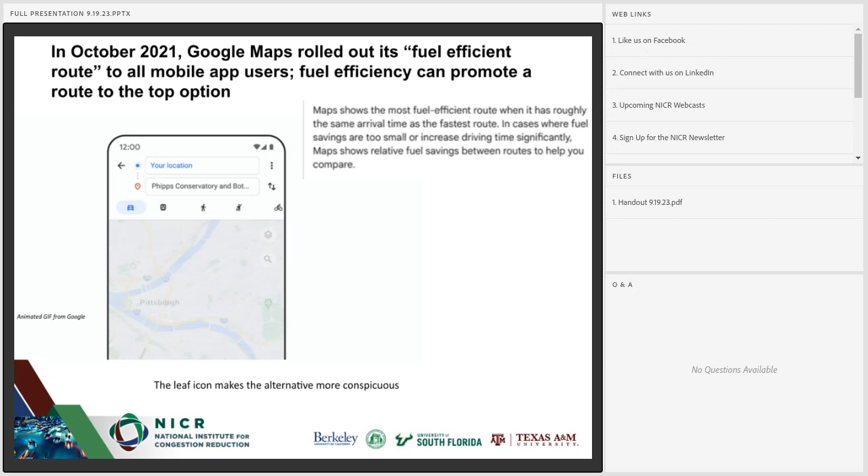So, to start with our analysis, we kicked off our evaluation with the RouteE model, which is basically an open source tool that gives you an estimate of how much energy your vehicle will use on a particular route. The NREL model indicated that it included factors like road grade, speed profiles, and road type. So we tested three scenarios.

The first one was where the car was traveling at 70 miles per hour for 6 miles, and then 30 miles per hour for 6 miles. The second one was where the car was traveling at 70 miles per hour for 1 mile, and then 30 miles per hour for 1 mile, repeating this cycle 6 times. And the third one was where the car was traveling 70 miles per hour for 0.5 miles, and then 30 miles per hour for the same distance, repeating this cycle 12 times.

To our surprise, we noticed that all these scenarios reported the same energy or fuel consumption, that was 0.37 gallons of fuel. So, this indicates that the software was not accounting for at least some speed fluctuations. RouteE may be accounting for variation in speed when a vehicle travels 6 miles at 30 miles per hour, and it assumes a speed cycle that fluctuates around 30 miles per hour. However, the abrupt change to another speed, for example, from 70 miles per hour to 30 miles per hour, which can happen really frequently during peak hours on general purpose lanes, was not accounted for.

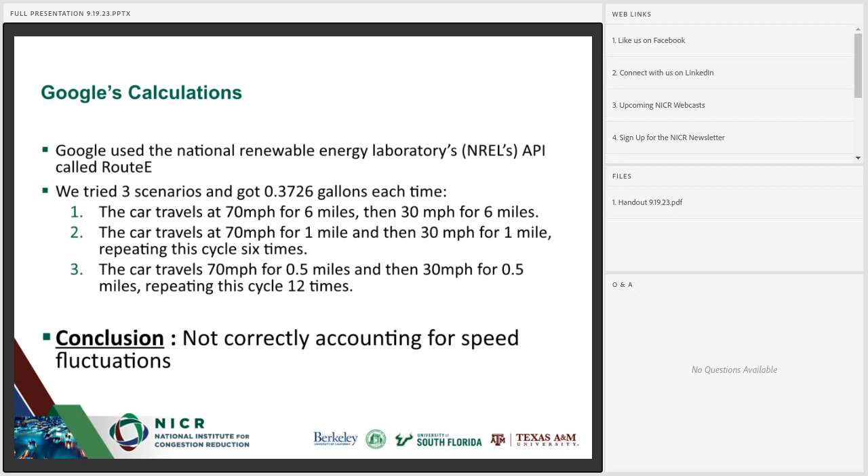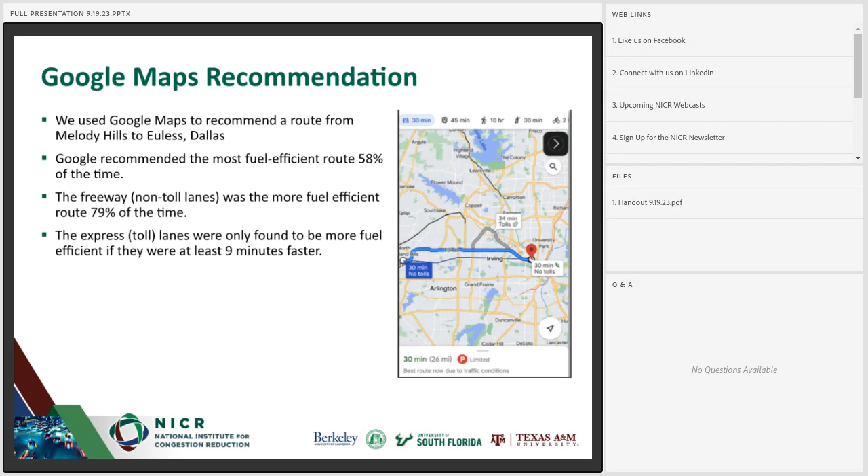We then studied the trends in the recommendations suggested by Google Maps. We did this by selecting different origin and destination points, like from Melody Hills to Euless, Dallas, at various times throughout the day. We recorded what Google suggested for the route, including the travel time and the type of lanes it recommended, and we found that Google recommended the most fuel efficient route 58% of the time. And the non toll lanes, that is the general purpose lanes, were the most fuel efficient route 79% of the time. And the toll lanes, that is the managed lanes, were only found to be more fuel efficient if they were at least 9 minutes faster.

So, after the initial investigation, the next logical step was to carry out vehicle runs and collect our own data on speed, traffic conditions, time of the day.

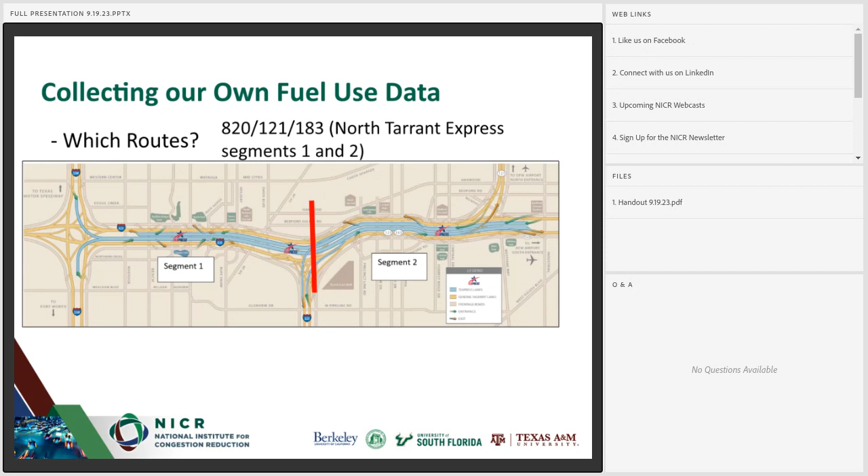To do this, the team selected North Tarrant Express lanes in Dallas. We categorized it into segment 1, 2, and 3. Segment 1 was the Northwest Loop, segment 2 is the Airport Freeway, and segment 3 is the I-35W Interstate Highway Corridor.

We chose our study location where freeways had managed lanes and general purpose lanes running side by side. Also, the selection of these segments was also influenced by the ease of access and the granularity of the data from Regional Integrated Transportation Information System, also known as RITIS.

The speed data from INRIX was used to identify the typical speed fluctuations across the time of the day on both managed lanes and general purpose lanes. We then generated box plots displaying the speed distributional characteristics. From these box plots, the research team identified the speeds on managed lanes and general purpose lanes at peak and off peak hours.

The graph here displays speed fluctuation on the managed lanes of the Northwest Loop in the eastbound direction. It clearly illustrates two peak hours, one in the morning and another in the evening. The morning peak hour has slower speeds compared to the evening peak hour, suggesting that there is more traffic congestion during the morning peak hours.

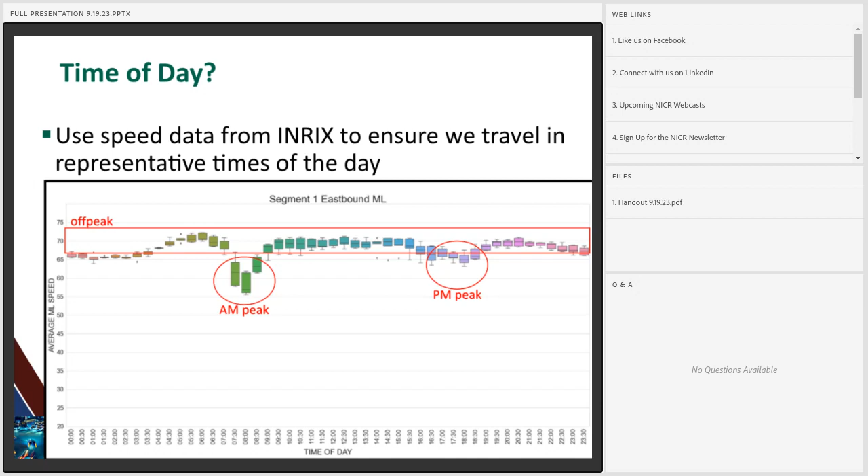Whereas on the general purpose lanes, we have AM peak, PM peak, but we see significant congestion levels during the midday as opposed to managed lane.

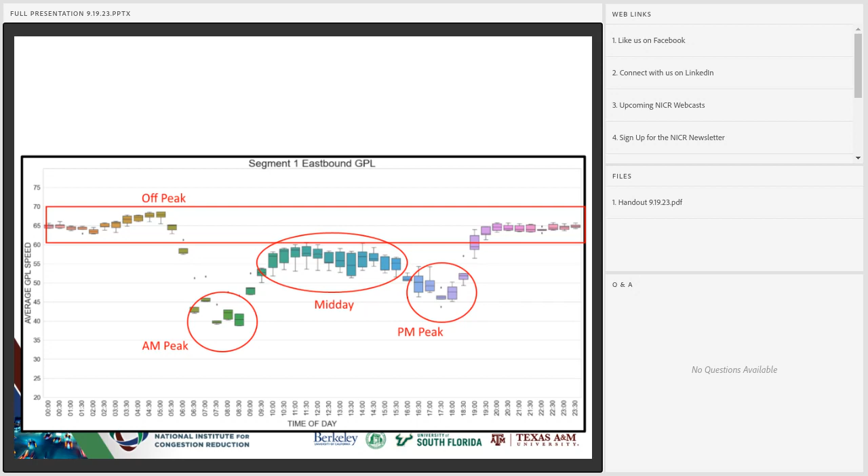So now I would like Jeremy to take it from here. Sure. Thank you, Mahim. Let's see if this works.

Okay. So my main job here at TTI is running our emissions laboratory, where we do a lot of testing. And a lot of the testing we do has to deal with collecting in-use data for vehicles and fleets. And so, as Mahim mentioned, part of this project was to collect some real-world data on the segments of roadways that she already mentioned.

So the way we did that is we used what's called OBD data loggers. They plug into the OBD port of a vehicle and record data that the vehicle reports while it is operating. The data loggers that we typically use at TTI are from a company called HEM Data. You can see a picture of it here in the upper right.

These data loggers are fairly expensive. $1,000 estimate here is actually probably a little bit on the low side unless you're buying bulk. So they can be very, very expensive. So one of the things that we wanted to do as well was, in addition to using those that we typically use, was testing some alternatives that are cheaper.

You can find some data loggers online that are much cheaper. $15 obviously is way below what the HEM Data's cost. But there are some kind of drawbacks to those. Some of them require a smartphone connection that's shown here, where they don't always record data. So a user or driver would have to get in the vehicle, turn the app on, start the data collection every time they start the vehicle.

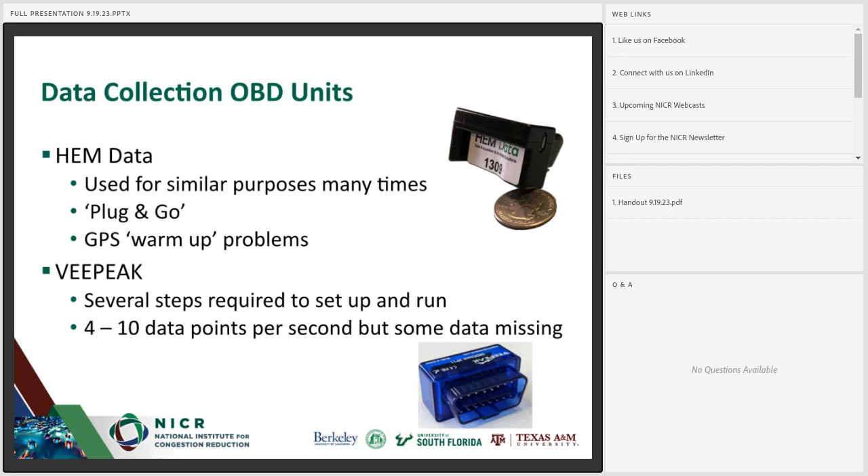So sometimes there were 4 data points per second, sometimes there were 10 data points per second, and then sometimes there would be multiple seconds in between data points that were just missing or blank. So one of the things that we did then to compare the performance of these two is we bought a splitter. That way we could plug them both in and actually record data at the same exact time and compare the performance of the different data loggers.

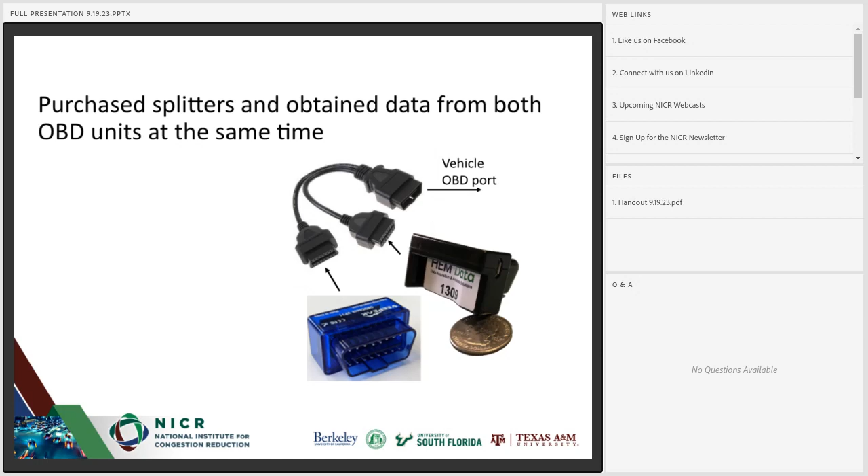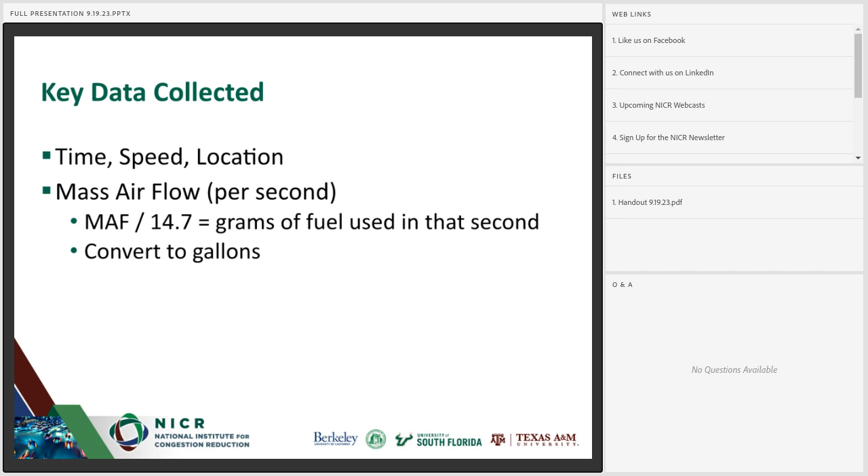For this project, the key data points that we needed were time, speed, location being a GPS chip that is embedded in the device, as well as the mass airflow that is being reported from the vehicle. And using these, it allows us to, on a second by second basis, estimate the fuel consumption of the vehicle. We use the mass airflow and do the calculation that's shown on here to get an estimated second by second fuel consumption for the vehicle as it drives on the roadway segments that we are interested in.

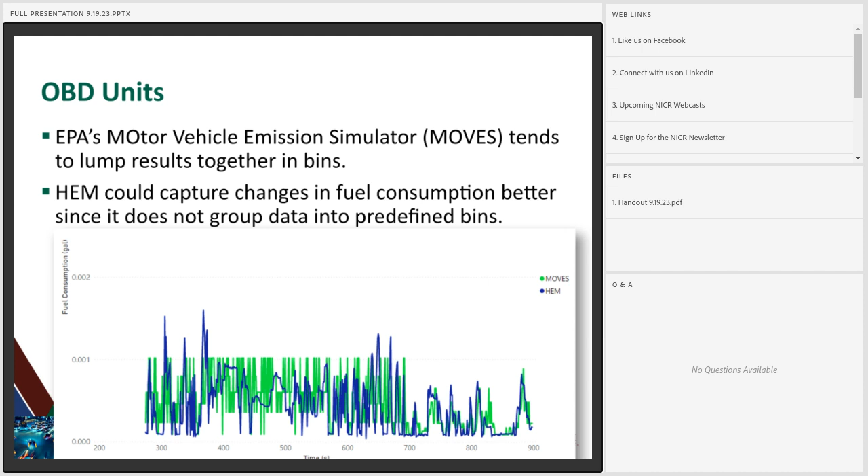So you can see there's a very distinct line at 0.001 or just above 0.001, where the MOVES model is often estimating, whereas the HEM data has more fluctuation in it as it drives. So it does track very well, but again, there are limitations, and that's mainly because MOVES was not designed to do that. It's meant more for a fleet of vehicles and population estimates versus single vehicles. So we were trying to use it in a way it's not necessarily designed for.

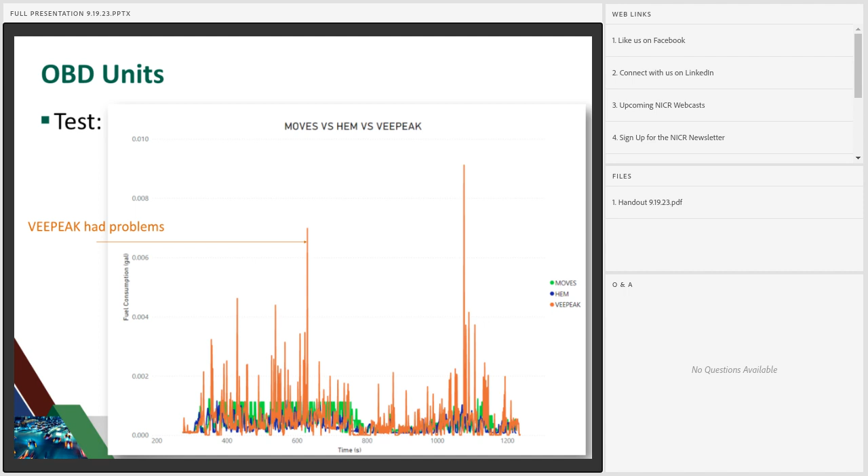And so now I'm going to go back and see what we had with the VEEPEAK. As we mentioned, the VEEPEAK data often had missing data. It would have a couple seconds where there were not any data. So we would either have to try and interpret that or just not have it in the analysis and the comparison. And it also seemed to have data where it spiked, as you can see here, greatly on different occasions. And so in the end, what we used for our analysis was the HEM data that we were able to collect.

Mark, I'll let you take over. Yeah, thank you.

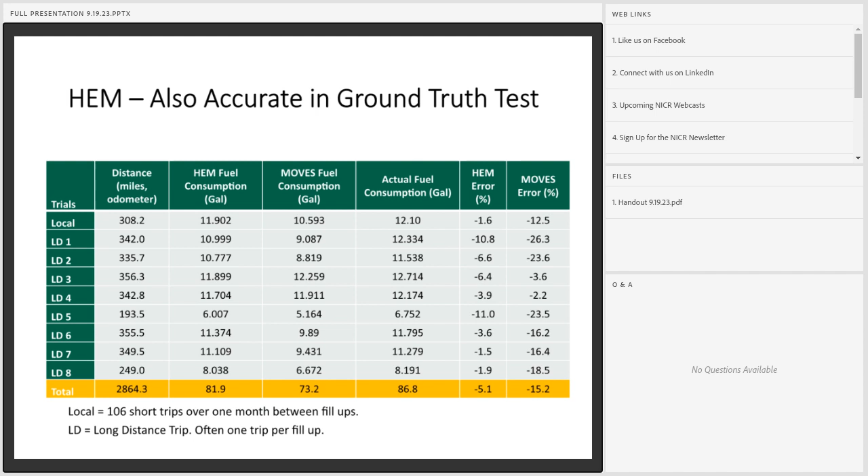So now that we had the devices and the roadways we wanted to travel and check for fuel efficiency, next up we attempted to get a variety of vehicles. And obviously this is a pretty small list. We didn't have a huge budget to do dozens of different vehicles, so we've got a relatively small list of vehicles. We tried our best to get a different variety of SUV, sedan, hybrid, and pickup truck.

We ran into some difficulty getting hybrid vehicles, as they were difficult to rent, and some difficulties with pickup trucks in that the newer models didn't provide mass airflow. When we had the HEM data device, it didn't grab mass airflow from newer model pickup trucks, Fords. So we had some limitations there, but nevertheless, we went out and collected data on those 2 roadways Mahim mentioned.

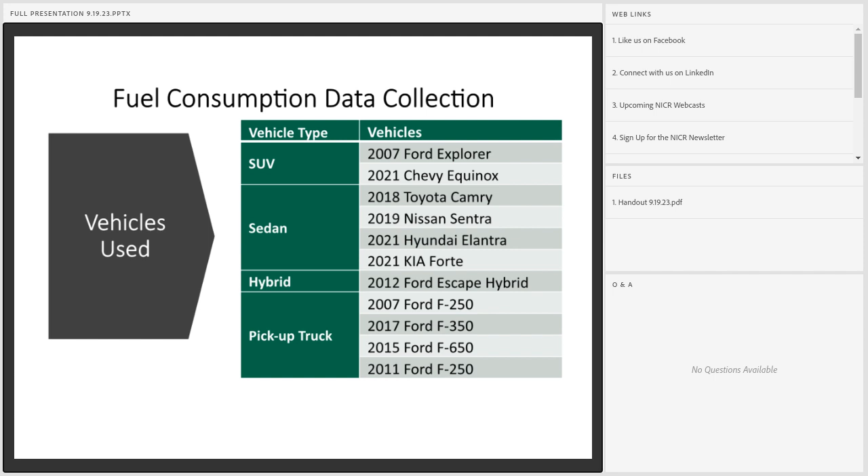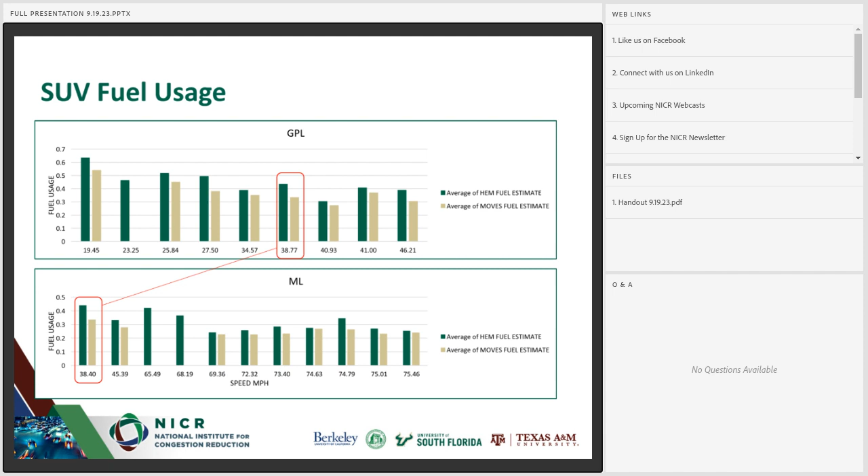You'll also notice that the HEM fuel estimate here is generally higher than the MOVES fuel estimate, probably meaning our SUVs are less fuel efficient than the average SUV used to put together the MOVES fuel estimate. But some fairly consistent results across the speeds. But we can quickly see we didn't have enough data. Even with 100 plus trips, there were far too few on a given road in a given vehicle type for a specific speed to do a whole lot of comparison of managed lanes versus general purpose lanes on these full length trips.

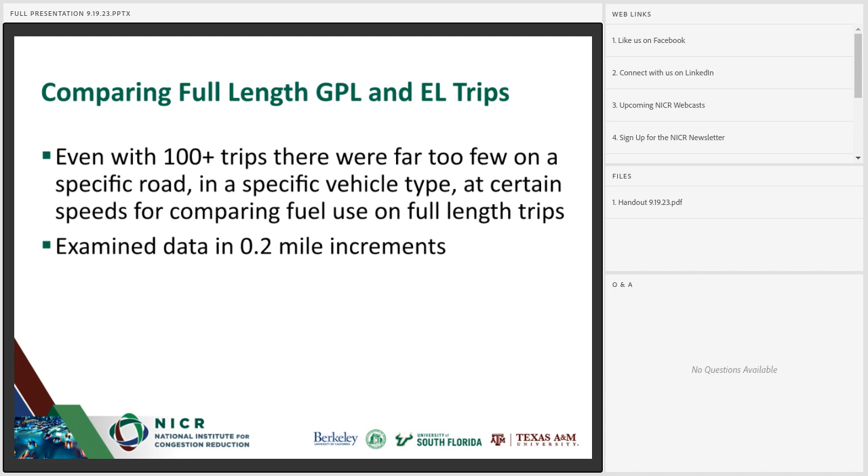So RouteE used 0.2 mile increments to do their analysis, and we used their API to calculate the amount of fuel used in 0.2 mile increments. And we thought, okay, we can do the same thing. We have GPS data, second by second GPS data. We can cut all of our trips into 0.2 mile increments and estimate the amount of fuel used each 0.2 miles. And when we did this, we would look at our results from the HEM data, and we looked at RouteE, the API estimated fuel use over those 0.2 miles.

Let me grab, looking over, oh, wrong button. Draw. No, it's not letting me draw on here. Okay. Oh, there it is.

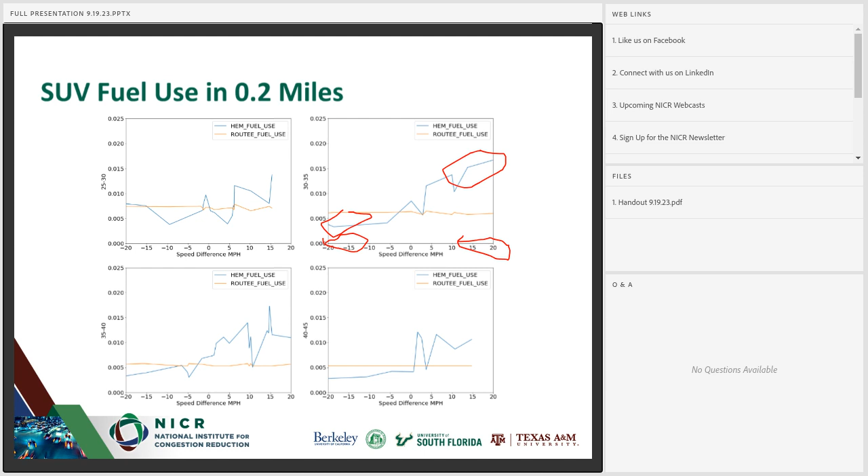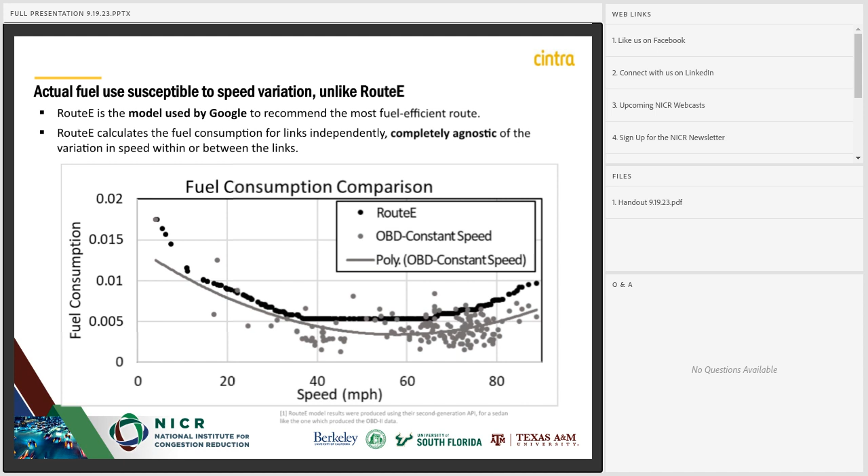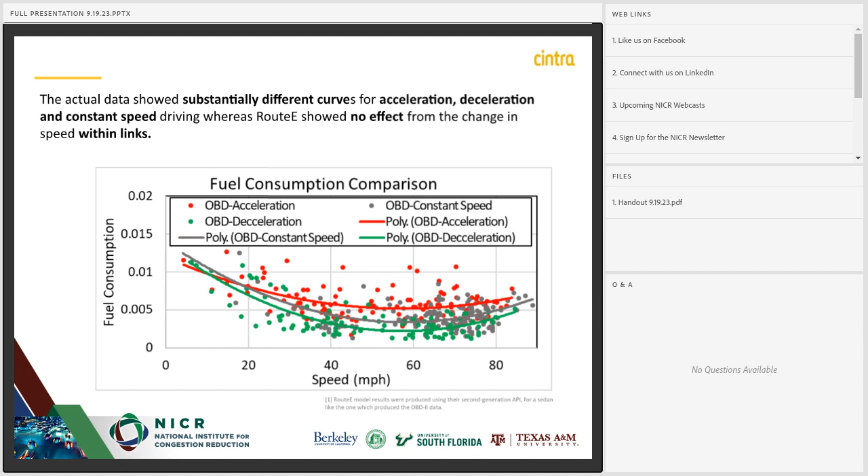And we'll see even more variation if we separate out when our vehicle was accelerating. You see that in red, and the amount of fuel used is generally higher when the vehicle's accelerating and generally lower when the vehicle's decelerating over that 0.2 miles, where again RouteE gave you a consistent value of fuel use.

So in looking at this, we thought, okay, we've got enough data to do a test of a concept here. Can we develop regression equations for the amount of fuel used in 0.2 miles for a given vehicle type at a given average speed and a given amount of speed change?

If we can do that, we can apply these equations to Wejo data that is available, and in this case, Cintra purchased Wejo data for their facilities, North Tarrant Express, and they have detailed data. It's typically 5 to 7% of the entire traveling population out there, so 5 to 7% of traffic. You have the exact speeds of those vehicles. So we applied our regression equations to these real world data of travelers out there on the freeway based on Wejo data.

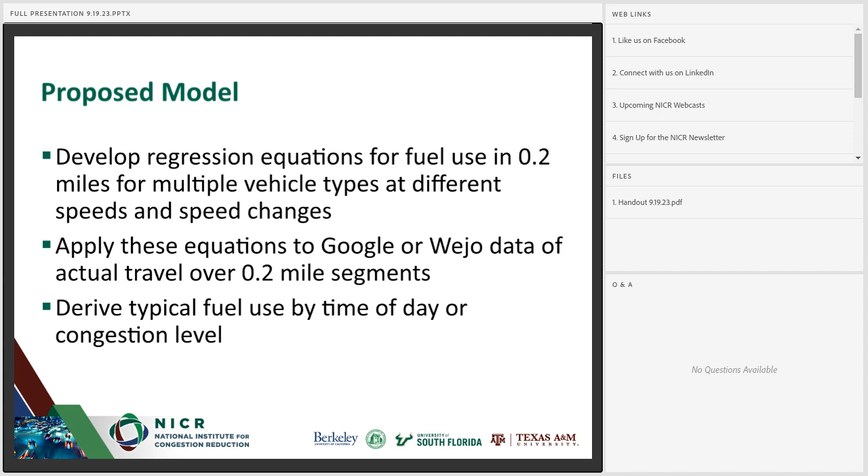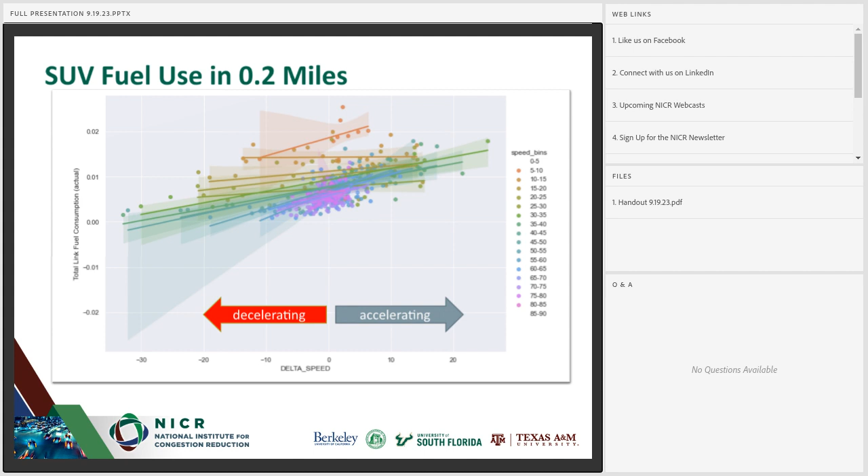over that 0.2 miles. And we could do that for all of the vehicles on that section of roadway, and then add those 0.2 mile segments of roadway together to get the amount of fuel used over the entire general purpose lane or managed lane on a facility.

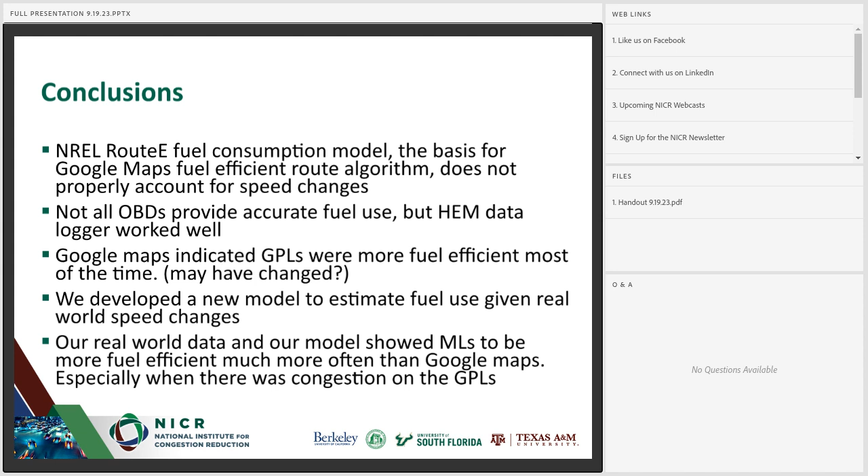So our next step is to have a much larger amount of data and more vehicle runs and a larger variety of vehicles, because we know our sample is relatively small. It's more of a proof of concept that, hey, we can get real world data to feed a model to get better instantaneous fuel use information. But we need to get a lot more data, and Cintra is moving forward with this as we speak in Austin, giving a lot more HEM data units to more drivers and collecting data right now.

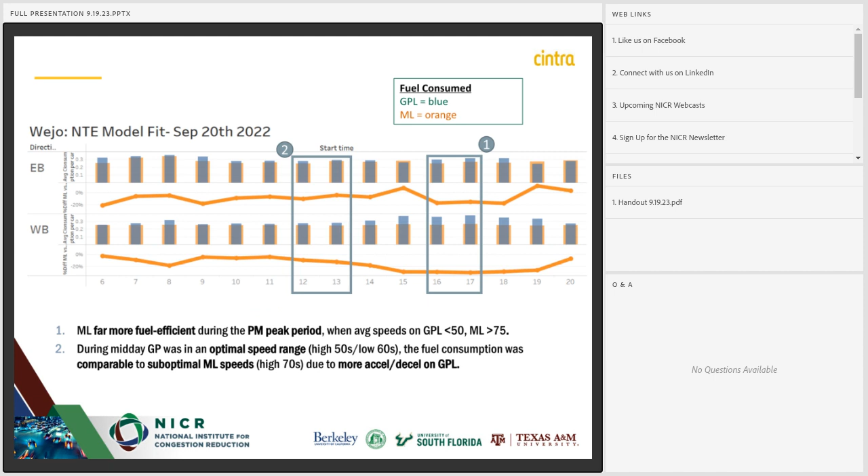Can we get the data? Get the data API? We don't have an API for this. What we have are those equations, and those are available in the final report. I'm flipping back to those. Like the extended version of this, we have.

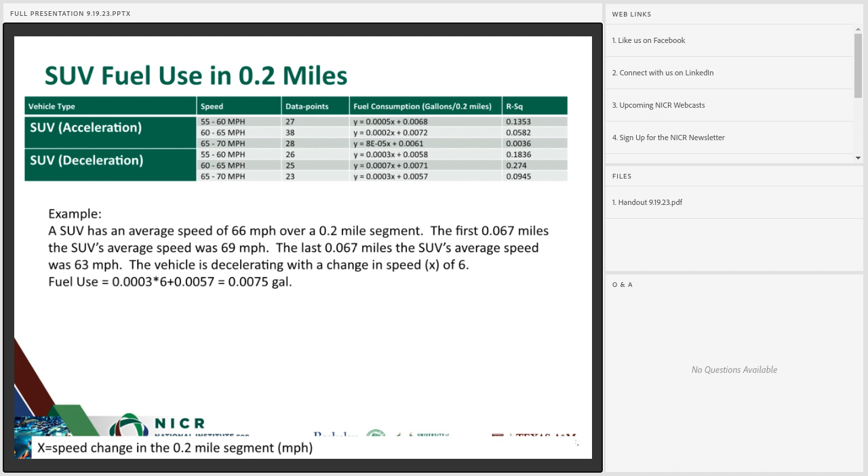At this point, they're interesting and a good proof of concept, but I guarantee when we collect additional data with more vehicles and more runs, these equations will change. But the report has these equations for all our speeds for all of our vehicles. It's available in the report on the NICR website. Is the report currently available? Yeah, it's been out there for a while.